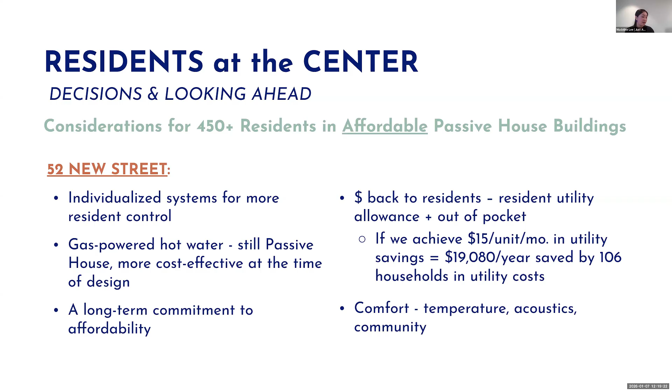And lastly, paying attention to how resident comfort will continue to be a factor as 52 New Street is occupied, and some feedback we've received so far from other passive house buildings is that the temperature control and the insulation that leads to better in-unit acoustics, or insulation relative to your neighboring unit in a larger building, can improve the experience of living in the community overall. So those are some considerations we had on the developer end up front, and I'm going to pass it over to Ben to talk more about design approach.

Thank you, Madeline. So RODE, as I mentioned, we're based here in the Northeast in Boston, and the firm was really founded on the principle that design has an intrinsic power that can really transform lives. And we sought to bring that to every arena where we are working. And part of that has really distilled itself down to these three values that we've come to recognize in ourselves.

And one is that we are working to build communities. And I hope as you hear this, you'll start to hear some resonance between us and why we are really excited about this partnership with Just A Start. So building a community to us could mean actual physical spaces, buildings or structures or neighborhoods.

And you'll see imaged here the three Brucewood homes. They're the first PHI certified homes in the city of Boston. They're down in West Roxbury. And that was a partnership with one of our other long-term clients to build speculatively. So they were built without a client or an owner in mind, just to see how the market took, and they sold before even construction was completed. So it's proving that there is really a strong appetite for passive house homes.

We also think of community building as the people and the social structures that we're looking to support through equity and accessibility in the buildings that we're creating. We always use our design process to build our projects around a central design concept. We find that concept through exploration of the physical site or the history of a place, or the goal or the mission that our client brings. And by building our designs around that foundational concept, we find that we can create something that is immersive and cohesive and really enriching for the user who occupies the space.

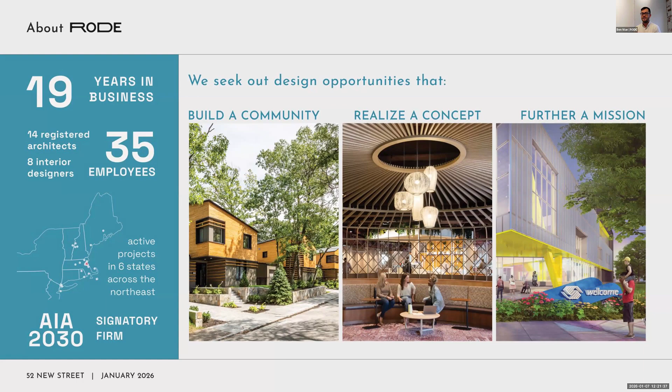And some of the projects that inspire us most as a studio are those where we have the opportunity to further a mission. So in this instance, taking Just a Start's goal of providing access to the riches of Cambridge, the rich experience of Cambridge, to families who might not otherwise be able to afford it, and to think about what creating a space that supports those residents would look like.

So the site at 52 New Street is in the northwest corner of Cambridge. I gave you a map here on the bottom left hand of the screen. You can see we're at the end of the red line, Alewife. We're about a half-mile walk from that site, and we're located near the Fresh Pond Reservoir here on the upper right, and the Danehy Field, which is one of the larger new parks that Cambridge has built. Danehy Field really provides a rich context for us to build in.

The site was formerly a clay pit where they were excavating the clay to build the bricks, which they used to build the city of Cambridge and Boston. And then once that industry left, the town reverted that to a dump. So it was actually a place for the refuse of the community. And when the MBTA Red Line was extended from Harvard up to Alewife in the 80s, they took the excavation and the dirt from that, and they used it to cap the landfill, and then turn that into this new amenity for the community and for the city at large.

So already we're seeing how there's these ideas of layers of history of the city in the site, and the sort of regenerative idea of turning something back into something that's green and that can be a part of serving the residents of the community, and how we can think about how Passive House would tie into that as a design concept and as a facade language.

So the Danehy Field, capping all of that landfill, is actually elevated up off of the street 16 feet. So it has this raised platform type condition that is really an interesting condition that we used as we're thinking about how the program of our site is responding to that abutting condition. It's a very long and narrow site. It has about 120 feet of frontage at the street, and then it's 400 feet deep. So we're thinking, how can we situate the program and the access, pedestrians, bikes, cars and trucks and loading, how we can make all of those pieces work on such a narrow footprint.

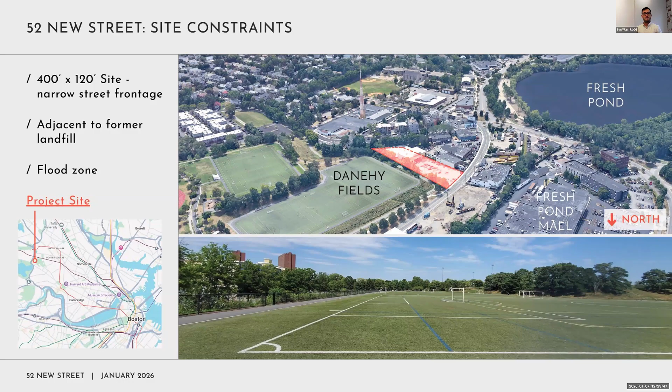And we're also in a flood zone. So out here in the northwest corner of Cambridge, there's some low-lying lands that are subject to flooding. So we have to keep in mind how our building is going to respond to elevations and grade changes while we're thinking about the populations that we're serving that need accessibility and ease of access.

So as we're evaluating that site, of course, initially massing is a critical step in how we're treating our design and how that reacts in terms of passive house performance. So with that long and narrow site frontage and the abutting condition of the park and that distant view that you could have of the reservoir and Fresh Pond in the distance, what is the form that this building wants to take and how will it respond? So obviously the most economic approach may have been to take a double-loaded corridor and extend it the length of the site and just have that simple extrusion.

You would have a very clean rectangular form, but that would put itself in tension with potentially the experience of the residents and how their spaces are responding to the green space next door, how the building is responding in terms of its form and its scale and its character to the residential neighborhood. You can see on the right side of the screen, there's a sort of medium scale existing context of buildings that are 3 to 6 stories in height.

And then there's also laying on top of that the goals of the city. So as Ken mentioned, this is the first project that was approved through the city of Cambridge under the Affordable Housing Overlay. And what that did, it was voted and approved by the people of Cambridge. It allowed for increased density relief from the zoning code if you provide 100% affordable housing on your site. And so as this project is providing 100% affordable housing, it's allowed to be a little bit taller, be a little bit closer to the property lines, and have a little bit more density.

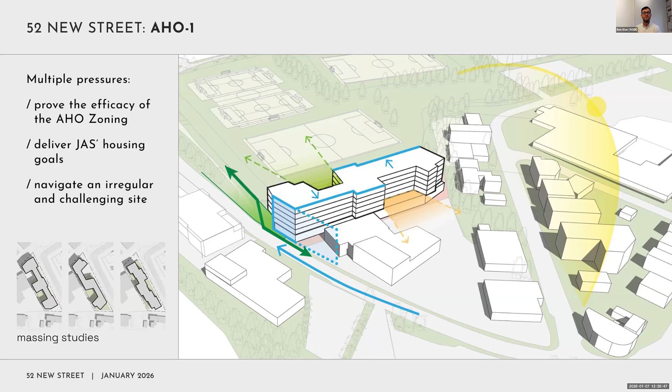So that dynamic massing that resulted from those two dueling courtyards resulted in a floor plate and a massing that did break down the scale of the building significantly. So we were able to take what was really long, that 400-foot long building, break it down into a series of masses that did begin to thread itself into the context of the neighborhood of New Street and of that residential neighborhood that was to our south.

It also had the benefit of giving us some more exterior corners that worked for the program goals that Just A Start had. This building is almost 80% family-sized units, so 2 bedroom and 3 bedroom units. And with those forms and the shifting of the courtyard, we're able to make those 3 bedroom units, give them a good solar orientation, good exposures to the park and to the distant pond.

You'll see a construction image on the bottom there that shows, I think we were up to about the 5th floor at this point. You'll see the structure that we are using. It's a podium construction. So for those of you who aren't aware, that's a concrete and steel at level 1, and then 5 levels of wood construction above that.

And you'll see our open web wood truss construction that's spanning from demising wall to demising wall for 1 bedrooms. We do have some intermittent bearing walls for our 2 bedrooms because the spans are longer. And that was in close collaboration with our structural engineer, Richmond So Engineers, to understand the bearing capacity and the depths that we need for those trusses.

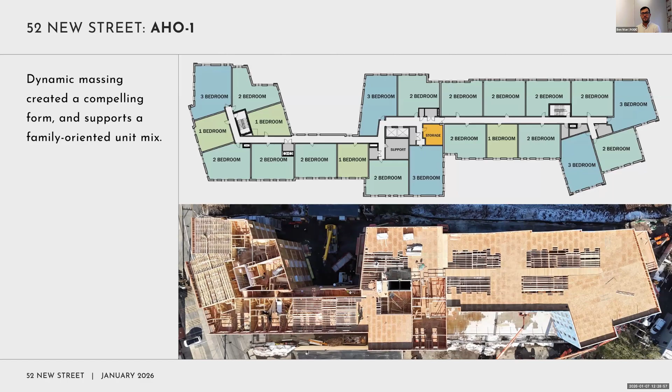We have a retail space that's located off of New Street. We have that break in the massing that provides this nice open courtyard at grade that allows residents to come off the street into this courtyard and then enter into a central lobby. And by centralizing our elevator, we're shortening the walk that residents have to go once they come up those elevators into their floor to get to their unit.

We have a good amenity program at level 2 with some community spaces, a business center to support residents' needs, a fitness center, and per Cambridge's direction, 1-to-1 bike parking. We're at a 0.34 parking ratio for vehicles and 1-to-1 bike parking, looking to feed into transit-oriented design as much as possible with this project.

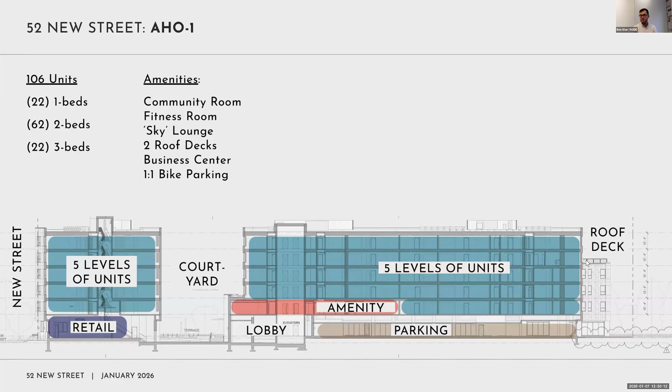And then in some of those massing steps that we have here at the southern end of our property, recall, this is where we're fronting onto that residential neighborhood to our south. We're able to carve a sky lounge and a roof deck for the residents up at that upper level.

I know we could go for an entire hour going over each one of these moments where we transition from one material to another, from one plane to another. But I'll go through in the next couple of slides some of those key inflection points where we had a push and a pull between insulation levels. You can see we have some pretty robust envelope constructions.

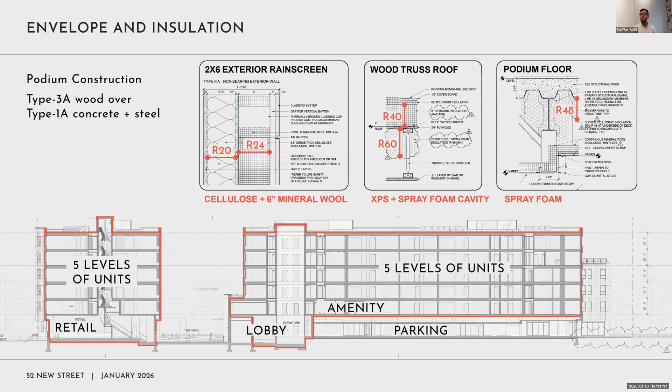And then because we have this parking, which is open air, naturally ventilated, we have the passive house boundary transitioning up to the underside of the level 2 slab, where again, we had to use spray foam as both our air barrier and our thermal continuity. But we passed in the early models, seeing well below the cooling demand, but just making it with the heating demand for the project using the alternative criteria that we are allowed for non-renewable primary energy.

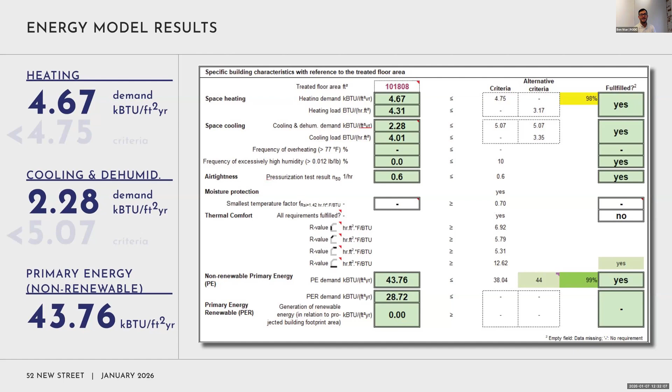I won't linger here. I'll admit that I'm not the passive house consultant on this job, so some of the more technical questions around this we may have to get back to you on. But suffice it to say, we were pretty tight in the thresholds and in the buffers that we had allowed ourselves as we entered into construction.

Some of the way that we were trying to take passive house and express that in the facade of the building allowed us to take a very economic approach with the facade, in that we were taking a fairly simple massing approach. And you can see that the windows are stacking and there's not a lot of massing push and pulls in terms of bay windows or step backs as the wall steps up towards the parapet.

But we use the depth of that insulation, and this was actually a fairly successful and fairly well received aspect of the design as it was moving through community review and with the city of Cambridge, that we could take that depth of the facade and use that to create this shadow line and this added depth that would have this intermediate scale of additional richness.

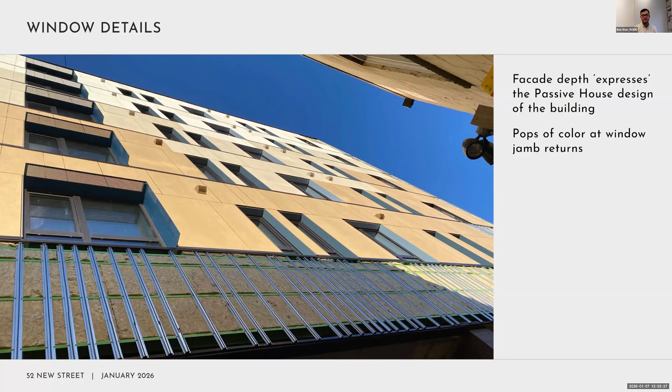Here you'll see we're adding an additional accent panel of color to bring a little bit of character and warmth, and then using perforated solar screens at the living rooms. You can see our facade assembly there at the lowest level, our thermally broken green girt system with external hat channels and the 6 inches of mineral wool stuffed between them.

So the window jamb detail really became a good point of collaboration between us and Callahan Construction, who is building this, and they're doing a great job of working through how the logistics and the sequencing of all these details are working.

You can also see in our facade language, recall way back to the history of Danehy Park and the kind of strata and the layers of history. We use that to inspire some of this shifting gradient that we're using in these earth tones to tie our building into some of that history of the site.

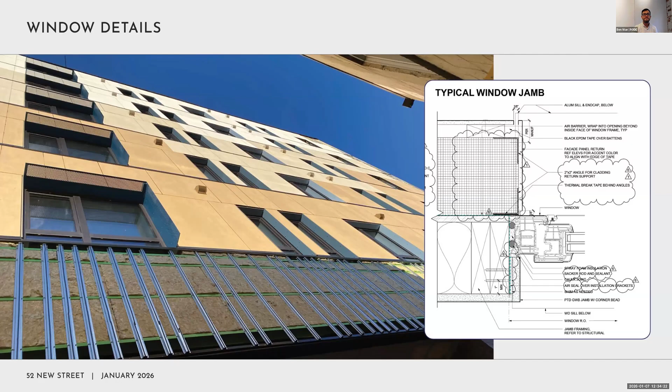All right, so I showed 6 inches of outboard insulation, and that ties a little bit into the energy model and the push and pull between the different performing standards that we had to work with. As we were evaluating the various ERV approaches, you'll recall that Madeline and Just A Start are working to give the utility savings back to the residents. And so part of that meant working with an individual ERV approach.

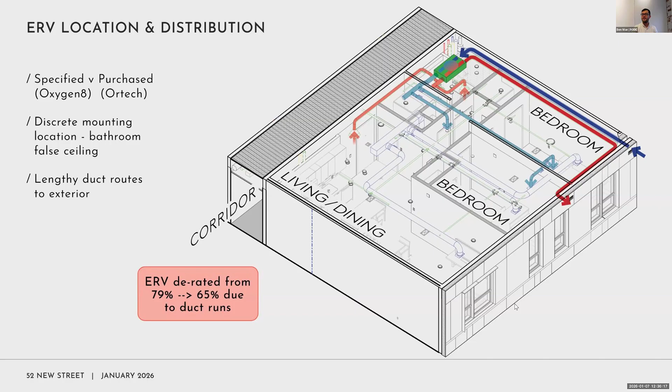So that was where the opportunity to potentially go from 6 down to 4 inches of continuous exterior insulation versus the sort of program goals that we had for giving these savings back to the residents and the location of the ERV. This is kind of a push and pull and a tangle of elements that I think might inform some different decisions as we move into our next projects, thinking about smart locations of that ERV, the need to service it, and the way that it's impacting the energy model, thinking about how those all tie together.

So another lesson learned that we're learning here at New Street is that we have to use, per the zoning, per the city's requirement, some screening of the mechanical equipment up at the roof. And anyone who's had to deal with wind loads of a metal roof screen, how that ties into a wood structure, understands the complexity of that joint and of that movement, and how those interface together.

So as we were working with construction, we accepted some VE, which was a significant cost savings for the roof screen. That resulted in a change to the mounting condition and a change to the structural interface between the post and the roof trusses. That required a change to the structural detail.

And then as we reviewed that with our construction passive house consultant, who was Steven Winter Associates, there were raised some concerns about condensation potentially and the dew point dipping below that roof membrane and starting to cause some potential issues with our roof at each of those mounting moments.

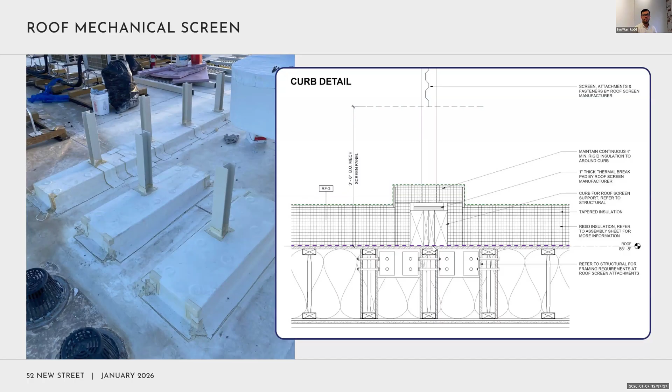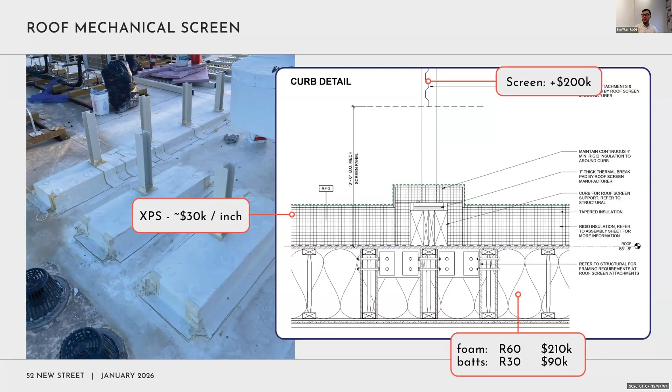So as we were evaluating the different levels of insulation, raising up additional continuous insulation above the roof had the implication of raising the height of the roof screen, raising those mechanical elements, or adding additional spray foam below the deck. All of those had some significant cost implications. So all to say, resolve some of these product procurement and detailing conditions early so that you can look at ways to save additional costs for those critical details.

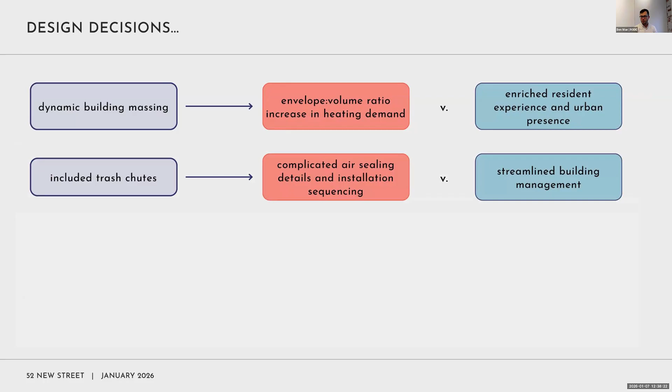So the idea is that we're trying to approach these projects with a strong sense of design and a strong sense of what these spaces and these buildings can do for their residents. As Madeline outlined, the goal of providing safe, secure, quiet housing for the residents, providing it affordably for residents who couldn't otherwise come to Cambridge.

How do you balance that idea of increased richness in the massing? Where's the point where that outweighs the idea that you're going beyond the envelope to volume ratio and overly burdening the energy model in a way that doesn't give back the enriched resident experience that you're trying to provide?

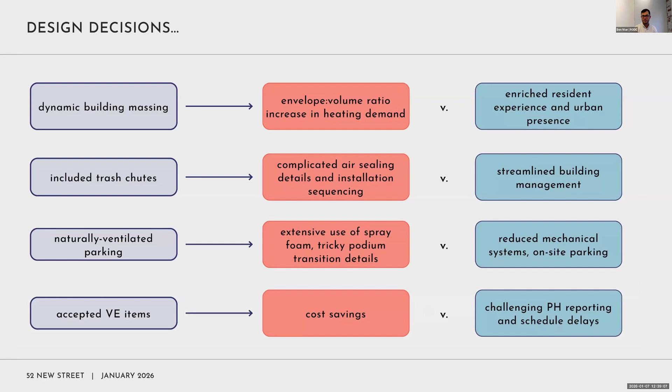Where are there moments where you're including a trash chute? We have a trash chute integral to the building, which really streamlines the operations and the management of this building. And with Just A Start, who is holding this into the future for the longevity of its project, it's worth actually working through the complicated air sealing details and sequencing of installation that requires.

So the goals that we have as designers and as architects, as we bring our skills and our problem solving to projects like these, keep in mind the experience and the richness that you're providing for the residents who will eventually call places like this home.

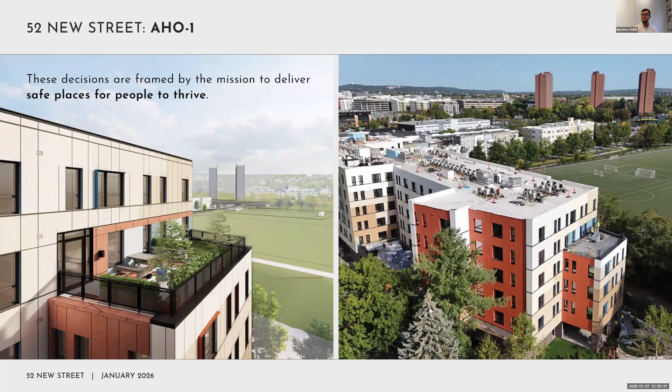Madeline, I'm going to pass it back to you.

Perfect. Thanks, Ben. So last piece too, before we go into more discussion, is just to be a little more forward-looking into occupancy. As Ben just mentioned in one of the previous slides, Just A Start is a steward of affordable housing for the long term. These projects have deed restrictions in perpetuity for housing affordability. That's also built into the affordable housing overlay zoning that this project's being permitted under too.

So this is kind of the shared outlook, and also this piece around a growing portfolio and resident population living in passive house buildings is really increasing in Cambridge and the local environment we're working in. And we want to have a good sense of how that experience is actually going as we move from modeling and construction to livability, increasingly and for more and more of our residents.

So I mentioned before, occupancy is on track for March 2026. And just for a sense of why these questions are also so urgent for us, we had over 2,000 households apply to live in this 106 unit building. So we want to keep doing more of this, is the bottom line. So on the next slide, I can just share a little bit more of what we're thinking about.